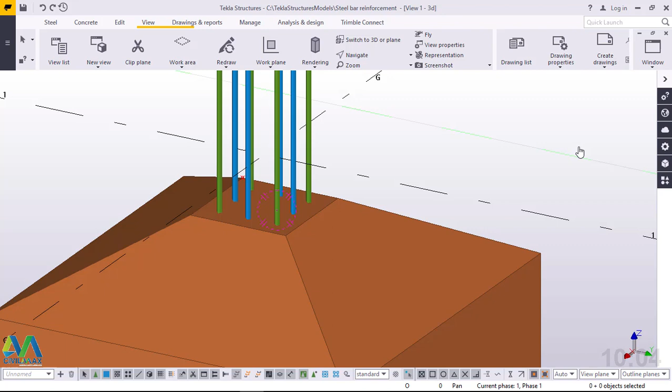If you take a look on the screen, you can see pad footings with some starter bars. Now what we want to counter check is the height of our starter bars. I'll double click on the starter bars, and the starter bars window will come up so I can check the length. The length is actually 600 from the top. This is the allowance we have been given to connect our column rebars to the sloped footing bars.

Now I'll close this, since I've seen the height of our starter bars. I'll click on empty screen just to remove that selection. Now the next step is to place our RC column. I'll come to concrete here and come to the column, then after activating that command, I'll snap right in the middle here.

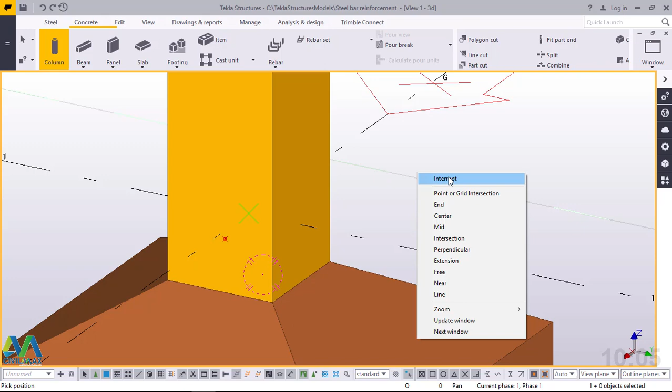Now what I'll do is change the dimensions of this column. I'll just double click on it. Remember, let me just take you back. I'll undo that.

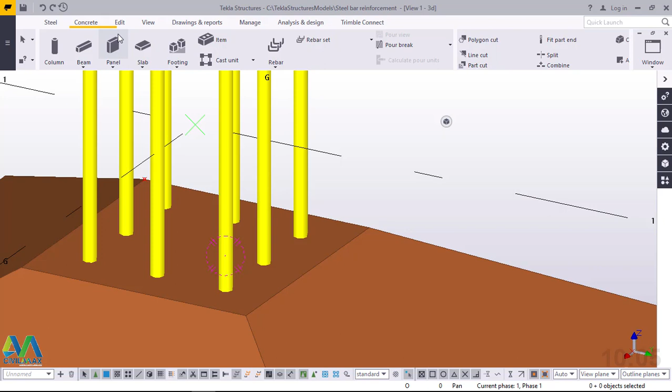Let's first check this measurement from this end to this end. I'll come to edit, then to measure, and click that. I want to measure from that distance to this distance - that's 400. I'll do the same thing here, from here to here - this is 400, I assume. So now it is 400, and our column should be 350 by 350.

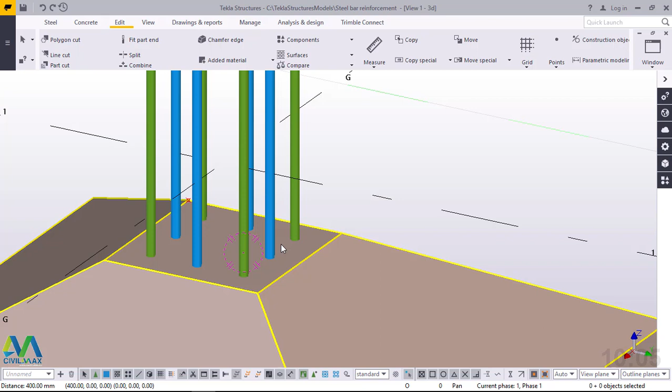Now I'll go back to concrete, pick on column, and snap right there. Right click and interrupt. I'll double click on this to change the dimensions of our column. You can see it is 400 by 400, and we want 350 by 350, not 250, we want 350 by 350. Let me snap in the middle there and feed 350 right there.

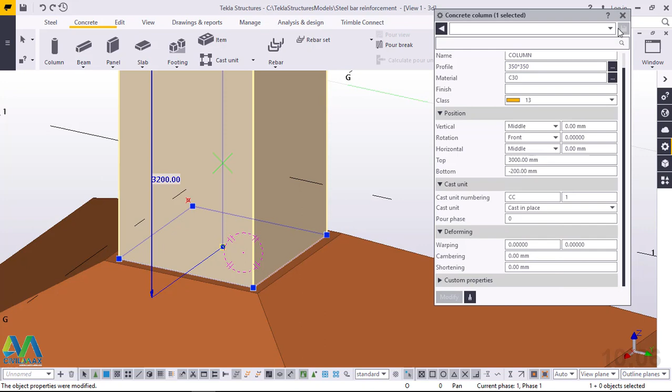Then I'll click modify, and this is what we want. It is 350 by 350. I'll come to navigate and turn this round so that we can see it clearly.

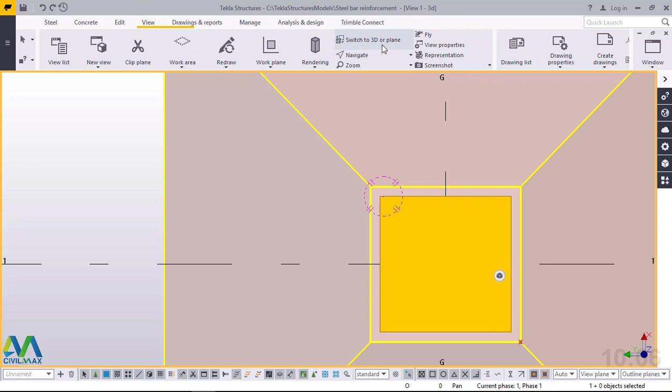If I switch back to top view, this is what you'll be able to see. Right click, this is our column. Now let me switch back to isometric view and bring this close.

I want to turn this round to a position so I'll be able to do my work properly. Let me click on this and click on empty screen. I'll right click and come to redraw to refresh and remove any part that is unnecessary appearing on our work.

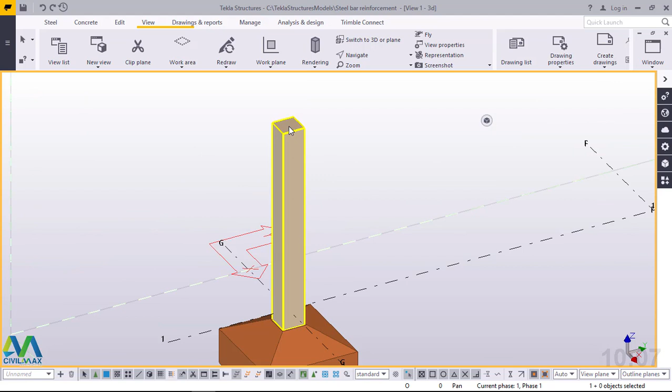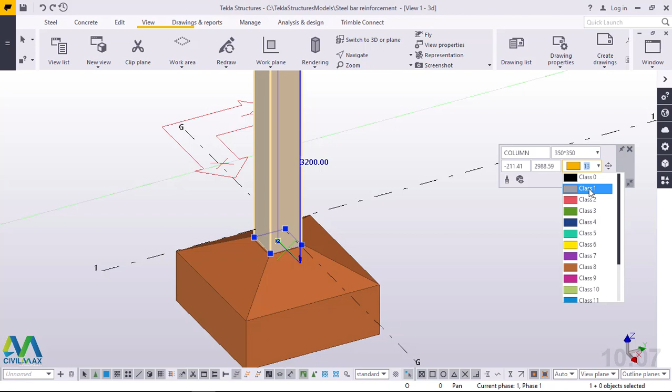Now if you take a look on the screen, the sloped footing has a different color, and the column has a different color, but I prefer working with some uniformity. I'll click on this column and hover my cursor on top of this cube here, which gives me the opportunity to pick the appropriate color to use. I can either pick that, then also change this, hover that, then change to a color similar to concrete, close to concrete.

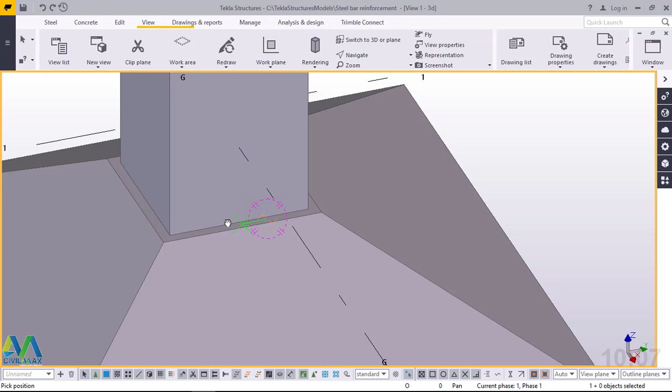Now this is what we have now. I'll come right there and turn this round like that. This is what we have at the moment, and this is our sloped footing. What we're doing now is placing the concrete column and connecting vertical bars inside our column to starter bars for our sloped footing.

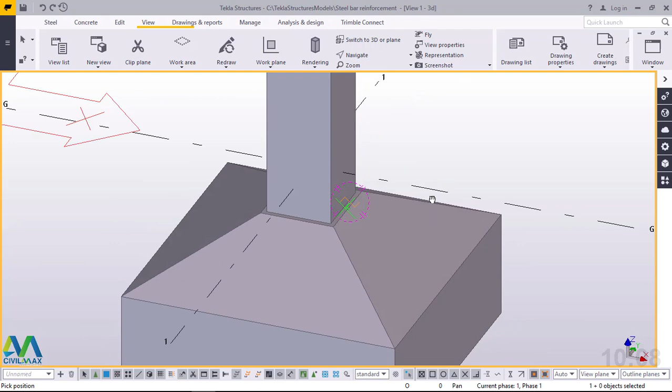Now from this end, taking into account that the height of our starter bars was 600, I want to mark some points here. Right from this end, I'll come to edit, come to any position, and I want to snap at the bottom end here. Prior to doing that, let's first check by how much our column is protruding into our sloped footing.

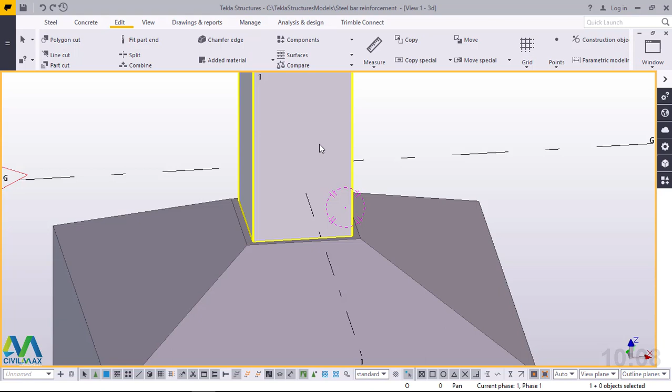I'll double click that just to counter check. Sometimes it goes deep into the footing. It has gone deep by 200 millimeters, and our sloped footing has also encroached close to 0 level by, I presume, 200 millimeters negative.

So they're meeting somewhere there, they're meshing properly. I'll click on empty screen to remove any selection, then start marking. I'll place a guiding point right here, snapping right at the bottom end. I want to offset this point to 600 millimeter height.

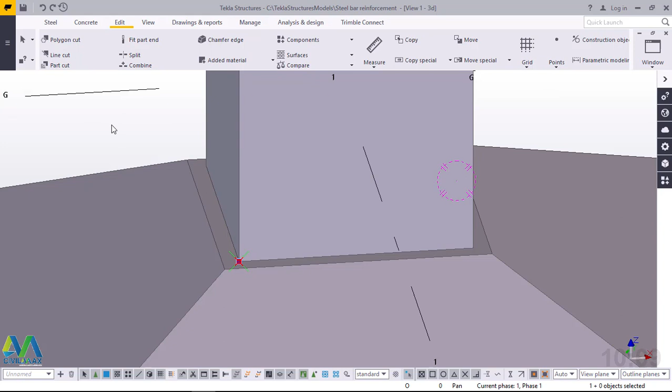I'll click on it, then right click and go to special copy, click linear. On linear, feed 600 on the Z axis going up, then click copy, click OK. After copying it, our point is here. This is the height of our starter bars.

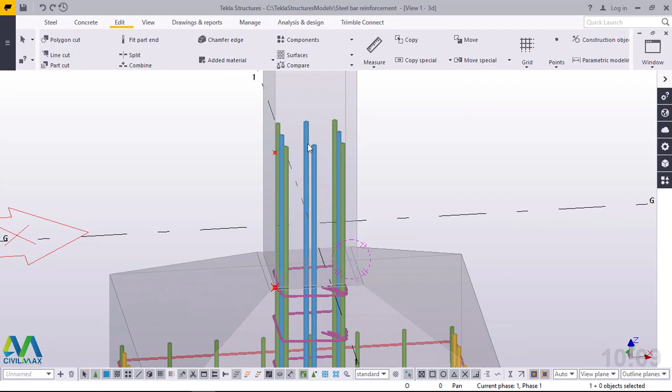It runs from the bottom end here. Then I'll press Ctrl 2 so that we work on a transparent view. It runs from the bottom end here to that height, which is 600.

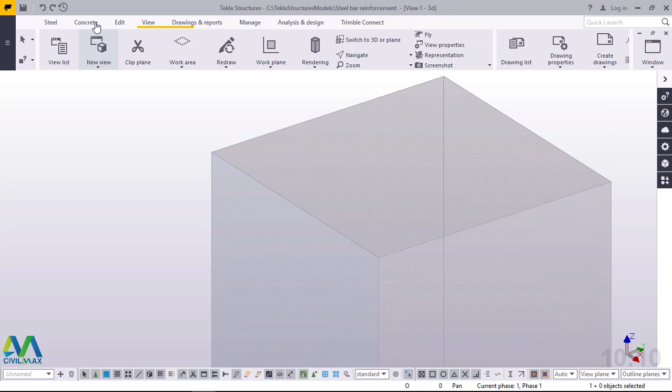Now we are going straight to rebar placement for our column. This one I'll place manually, which is much better. Now I'll come to concrete right here, go straight to rebar, pick on the bar group, then pick on the part to reinforce.

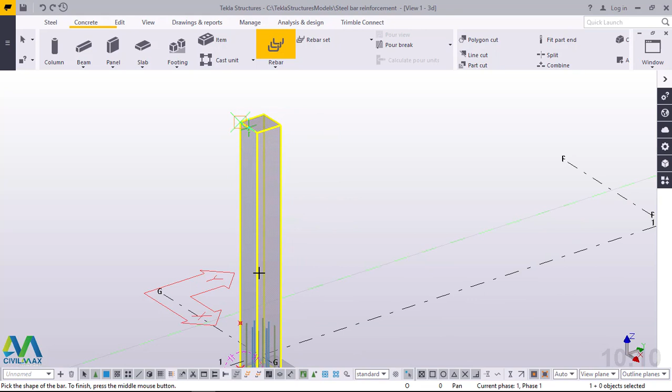Then I'll define the height of my vertical bar. I'll snap from that spot and stretch up to this end, terminating that full length to a point where my starter bars end. I'll snap right there, then press the middle button on the mouse to define the range of my reinforcement.

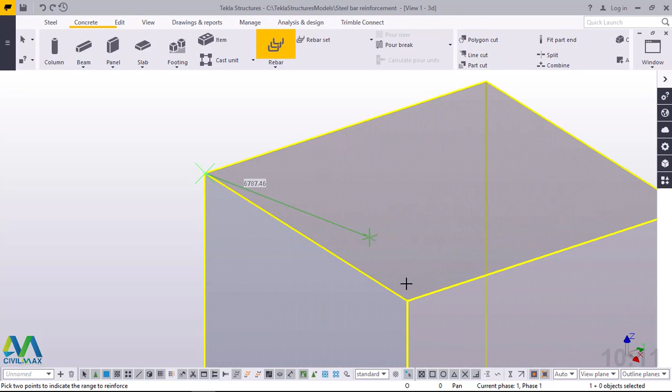I want it to start from this end and all the way to this end. Perfect. Now let me just turn this around to check by how much these rebars have offset themselves away from my column.

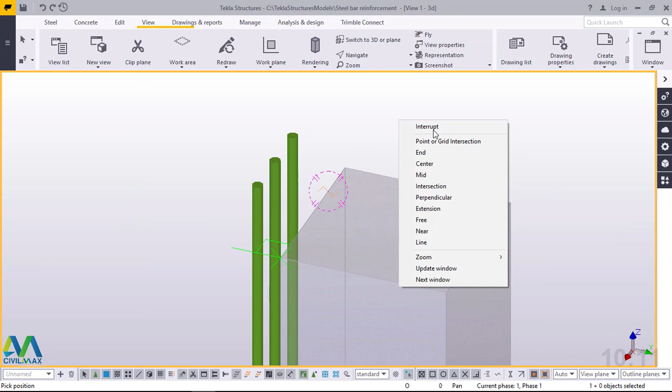Now I want to bring them back inside my formwork. I'll double click on this column, on these bars. Once I've done that, I'll scroll down to cover thickness and feed here.

This is controllable under cover thickness here. Our rebar size is 20, and we can change that to whichever size you prefer. I'm working with 20. The bending radius is that, and we don't need any hook right here. What will be of much importance to us is by how much our rebar is off the formwork.

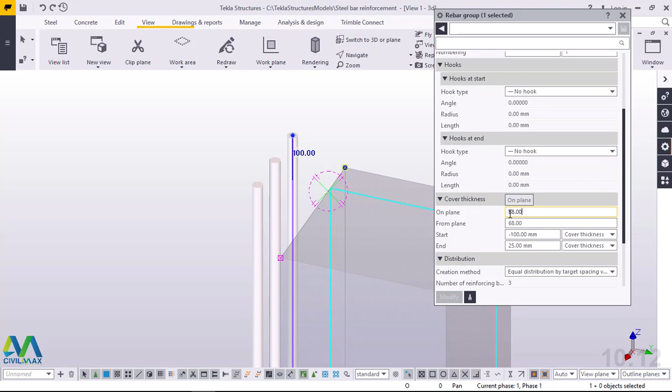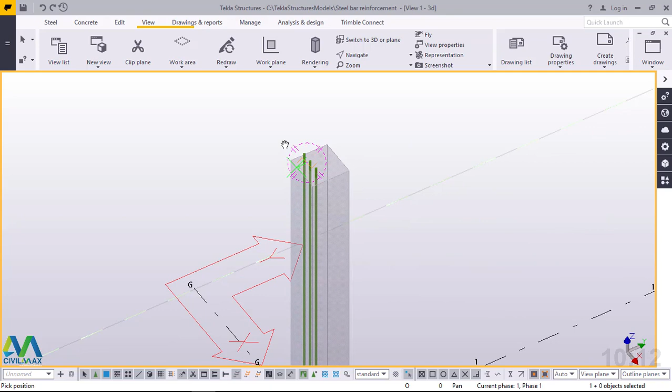Now I'll feed here 68, or it is 68 here, and in this case I'll prefix it with a negative sign. I'll feed there a negative sign right there, and click OK. I'll close this and click on empty screen just to deselect what was previously selected, and I'll do a similar thing here. I want to place some rebar right here.

Right click, then click interrupt, then come back to concrete right here, go to rebar right there, and pick part to reinforce. I'll pick on that part. Then I'll define the length, I mean the height of my bars.

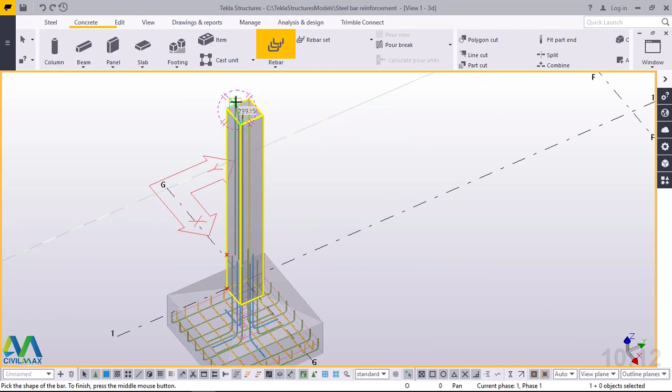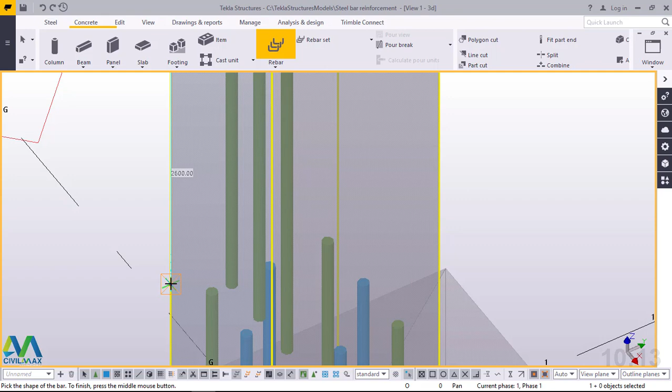Now the best direction is the other end. I'll click on rebar once again and do it on this end, because my guiding point is on this end. Let me just snap on this end, then go all the way and terminate that height of my vertical bars right here.

Then press the middle button on the mouse, then I'll define the range of my reinforcement by snapping on this end, and I want them to go all the way to this end. That is the part I want to be reinforced.

Now what do we do now? Here we don't need 3 bars, we only need 1 bar. And prior to giving it an offset inside our formwork, what we'll do is click on this, then right click and come to ungroup. We'll ungroup that, then we'll delete this rebar and delete this steel.

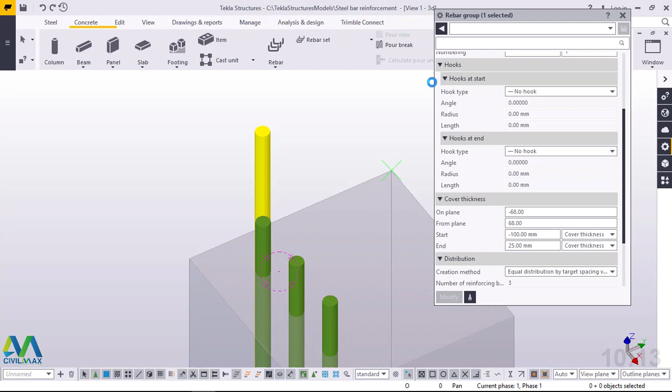Then we'll come to this middle one and double click on it. Once you've done that, we want to bring it inside our formwork right here, and we'll remove that negative sign from that distance. We'll not prefix that distance with the negative sign, and that will pull it inside our formwork right there. Then we'll close this for now and click on empty screen to remove that selection.

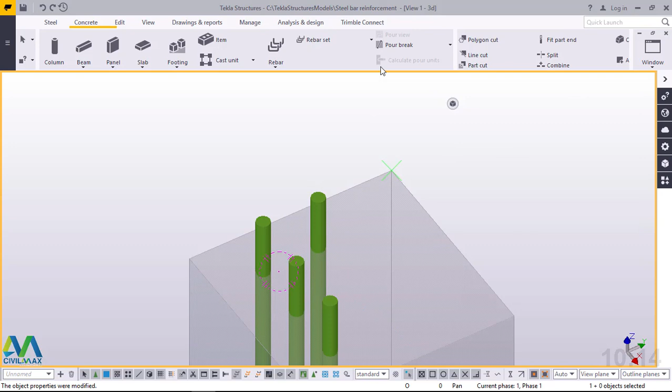Let me just turn this around once again for us to see clearly what we've done. This is what we've done. Now I want to mirror this part and this end. First of all, let me just select the first three.

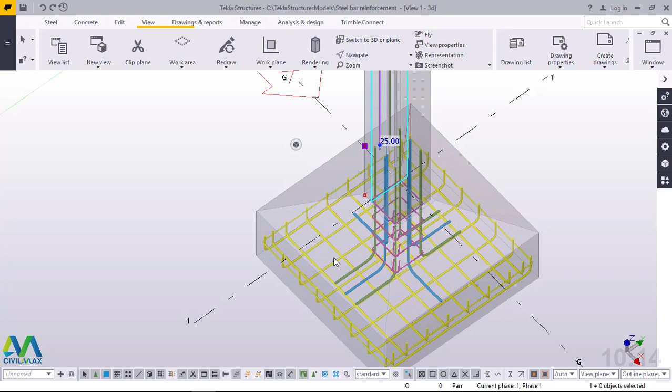Then I'll play around with my work plane tool. I'll come to work plane here and pick on work plane tool. I want to place my work plane tool right here so that I'll be able to define my mirror line. Now, that is the wrong place to place my work plane tool.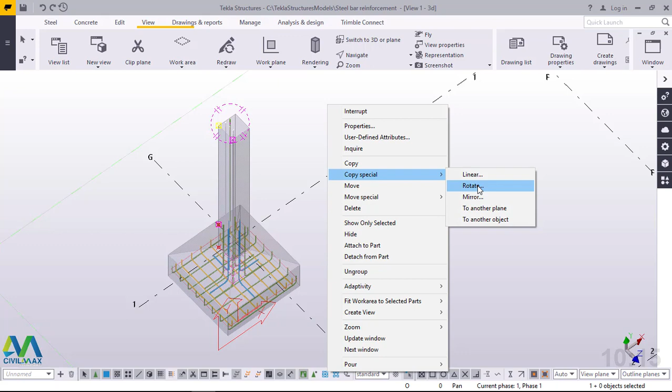I'll place it right here. Perfect. Now I'll right click and come to special copy. I'll click mirror. Once I've clicked mirror, I'll be able to create my mirror line from that spot and terminate it here. Make sure your angle is 90 and click OK. Copy. That's it. Right click and exit.

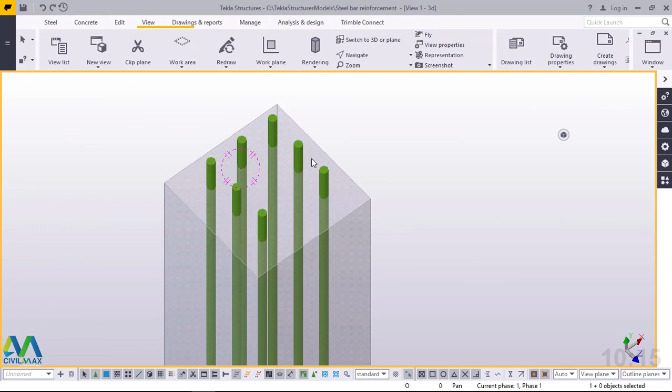It is here finally. Now let's copy this end. Click that. Then reorient your work plane tool. Come to work plane tool. Then we want to place it right here, so in a position that we'll be able to define accurately our mirror line. We'll place it right there, and we'll exit from that work plane tool.

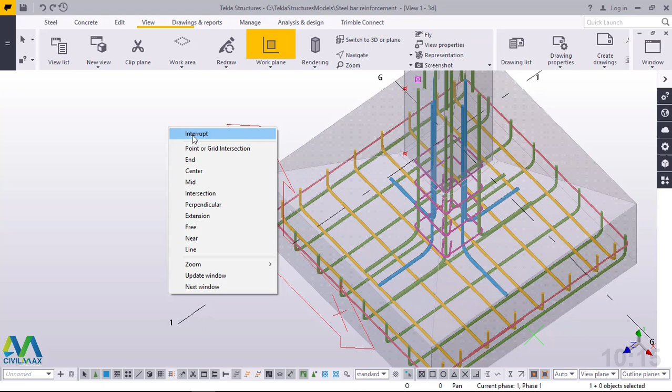To exit from any command, just right click and click interrupt. Interrupt is just a window, an exit window from that active command. Just click interrupt. Then once you've done that, just right click once again and go to copy special. Then from copy special, shift to mirror. I'll pick on mirror. Then I'll define my mirror line.

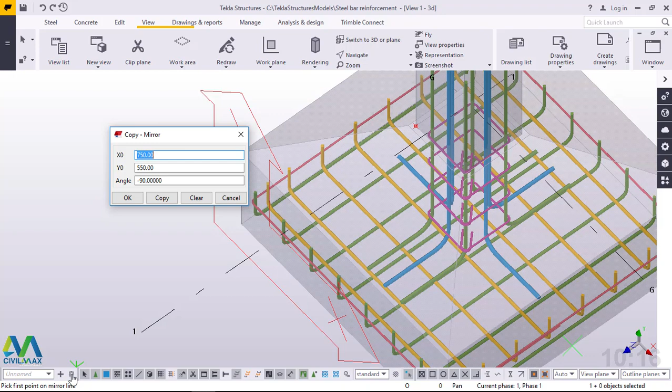You can read it there. Here, first pick on mirror, pick first point on mirror line. I'll define my mirror line here. I want my mirror line to start from that spot and go all the way to this end. I'll snap right there and click copy. Right click and click OK.

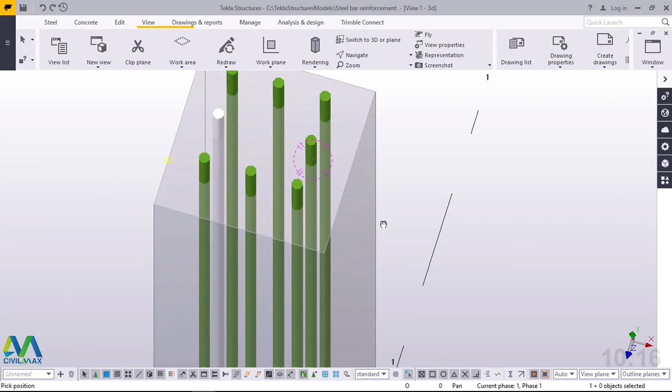Perfect. Now you can see that already shifted to this end, and my rebar and my vertical bars are now well seated or well fixed inside my formwork, so that the concrete can be easily poured into it, and we come up with a properly reinforced concrete column.

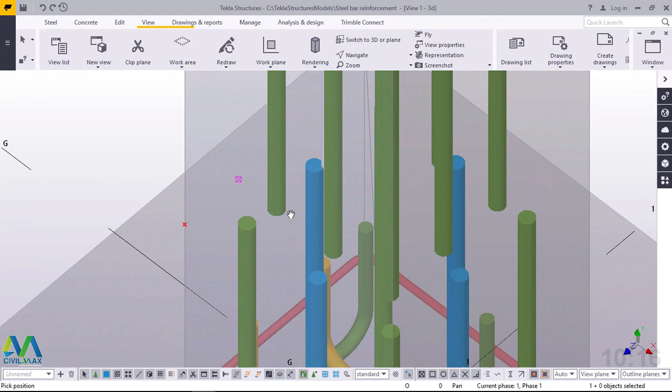Now next, we want to place the ties, and before placing the ties, we want first of all to make sure all these are properly connected. The protrusion is way inside, and what we are going to do is to correct this.

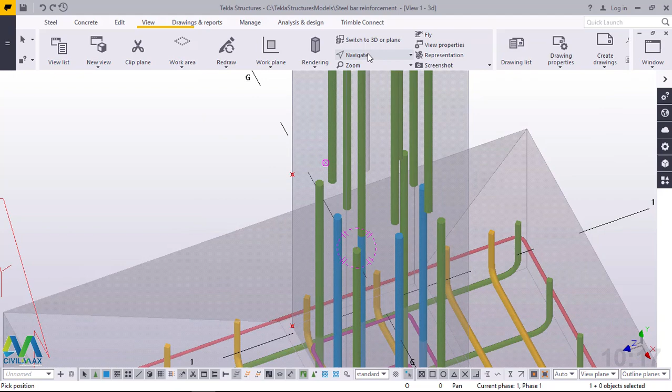Okay, let me just turn this round. You can see that. Now what we'll do, we'll come back to navigate, and we'll turn this to a position that we can be able to see everything when we play around with their measurements.

Double click on that, then that will bring this dialog box. From here we'll feed maybe 42. Then from plane you can also feed 42, and now click modify. Perfect. They're in the right position right there.

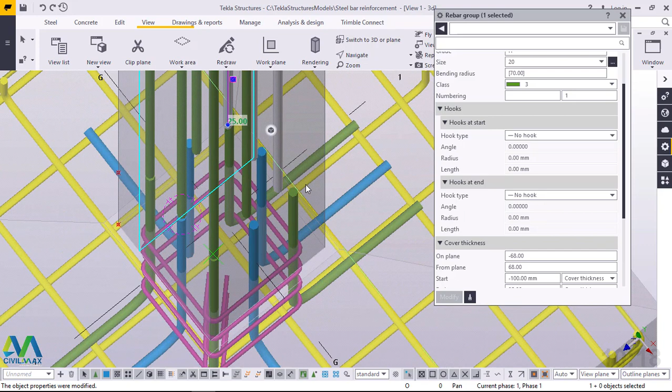Let me just zoom out and do a similar thing at the other end. Double click on that and zoom right at the bottom end here, and make sure the starter bars are facing each other perfectly. Now I've double clicked.

I want to reposition this right to be on top of my starter bar. Now what I'll do, I'll just type there 42, and I'll feed here also 42 on cover thickness. That is the formwork. I'll close this.

Now I'll do this. I'll do the same thing here. Double click that just to reposition all this. I'll come all the way to this end, and I'll feed 42 here and click OK. That will pull it to the right position and the cover thickness.

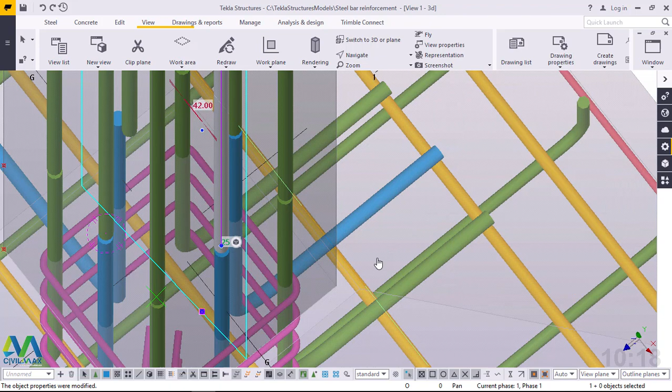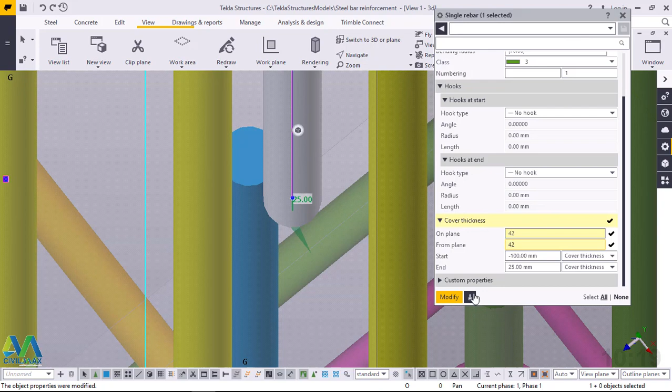And I'll do the same thing the other end. Double click that and I just zoom at the bottom end so that you can be able to see how this is shifting to the position I prefer. There, I'll just type 42, and I want that also to shift from the plane by 42 millimeter, and it will go right on top of that.

Remember, let me just turn this round so that I'll be able to see clearly what is really happening at this end. This one has positioned itself properly, and the other one hasn't.

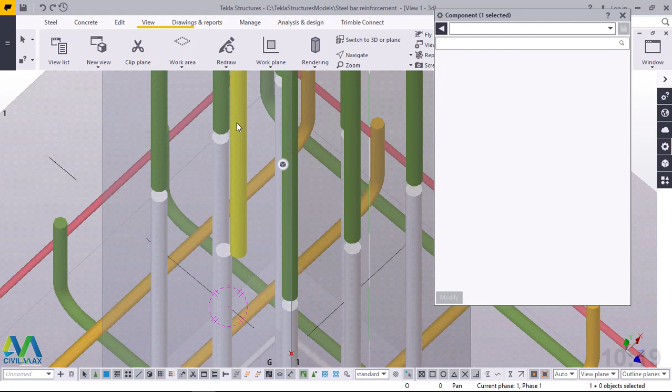And the reason why, we'll minimize a lot of work by deleting that. We delete that. I'll close this. Then we'll copy it right at this end by mirror command.

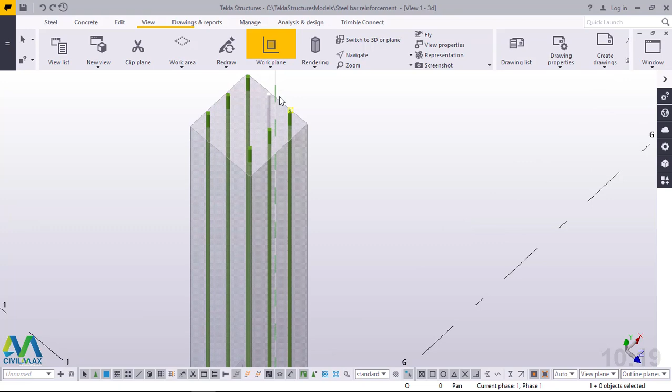Just click on that. Then I'll come to work plane tool right here. I'll place my work plane tool right here. I've already picked on it. I'll right click and come to interrupt. I'll come once again to special copy and click mirror.

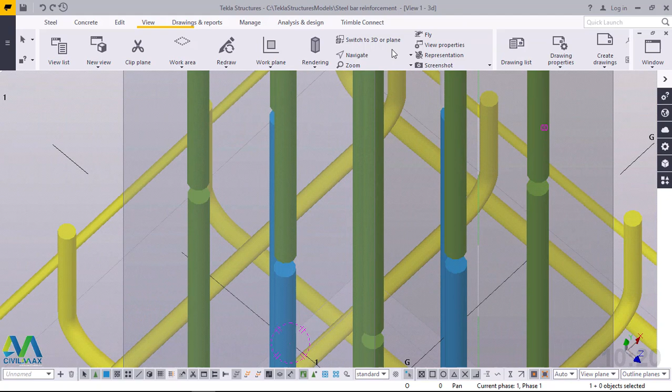I'll come all the way here and snap on that spot, and I want to mirror that to the other end. Click copy and click OK. Right click and interrupt. Let me check whether it has positioned itself perfectly. It is in the right position now.

Perfect, you can see that. The column, the rebars for the column are rightfully facing the starter bars for the pad footing. Now we want to connect these two. Let me just turn this so that we can see it clearly.

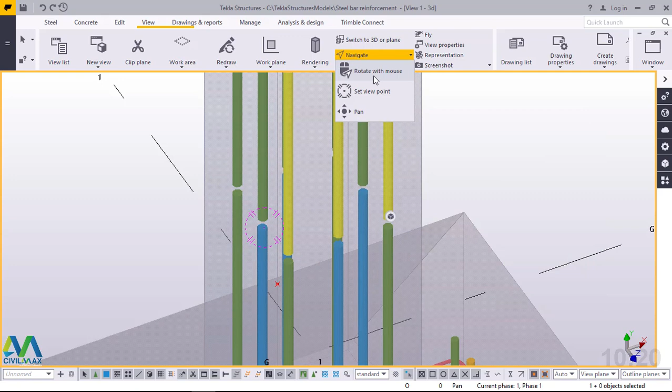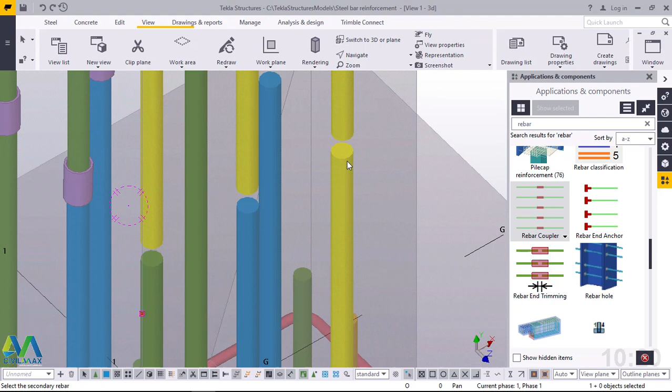Now I'll come to applications and component right here, and I'll type rebar, and use the rebar coupler right there. Click on the rebar coupler, and I want to couple this to this, and also couple this to this. This one should connect to that, and this one connect to this one, and also connect this one to this one, this one to this, and this one to this one. That's all. Let me turn this around so you can see it clearly.

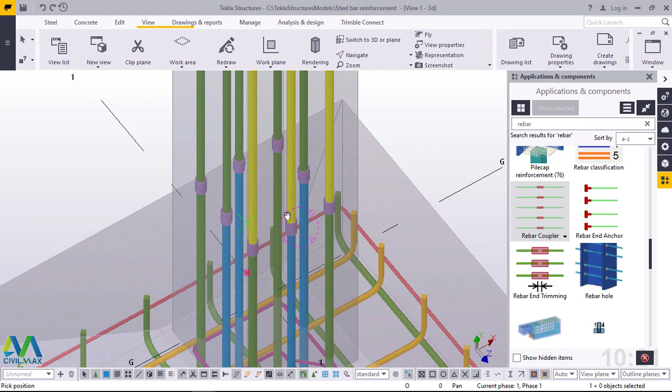Now this has been done, and what is remaining is just to place our ties. Now we'll go to ties placement. We'll go straight on top here. Right click, and we can now redraw this.

We'll come here and turn this round like that, and go straight to rebar right there, come to rebar and pick on that, and pick on the parts we want to reinforce. Pick on the part we want to reinforce.

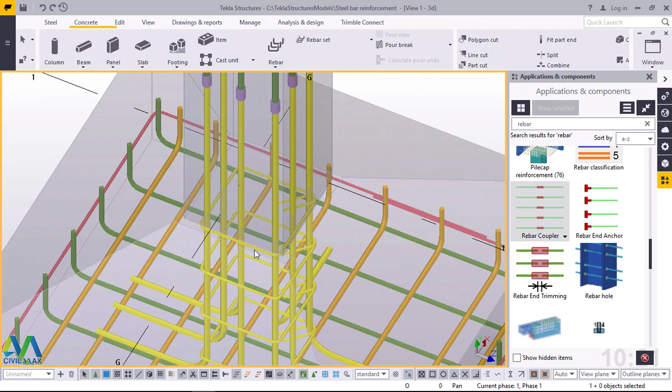What I've just realized... that's okay, we've done nothing wrong.

We'll come back to rebar right here and pick on the part we want to reinforce, and snap on top of this bar and come all the way to this end, and snap right here, and snap also right here, and snap on top of this bar and go all the way to this end, and press my middle button right there, and I'll define the range of my ties. I'll snap right there perfectly, and right click and exit from that spot.

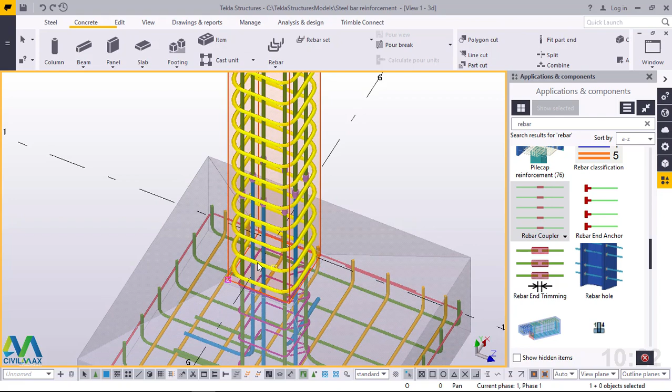Now what we are going to do is reorganize our ties. Now what I'm going to do is just double click on the ties. Once I've done that, I'll wait for this dialog box to load.

Then we'll use R8, or whichever bar we would like to use, but the size I've picked here is diameter 8. Now on hook to start, I want my hook to bend at 135 degrees, and that length is okay.

Also here I want 135 degrees. That bend radius is okay, and length of my bend, I just leave it at 90. And at cover thickness here, I'll feed 15, and also...

And here also I'll feed 35, which will be okay, and this will be adjusted to 25. I'll feed here also 25. Perfect, and I go straight and click OK.

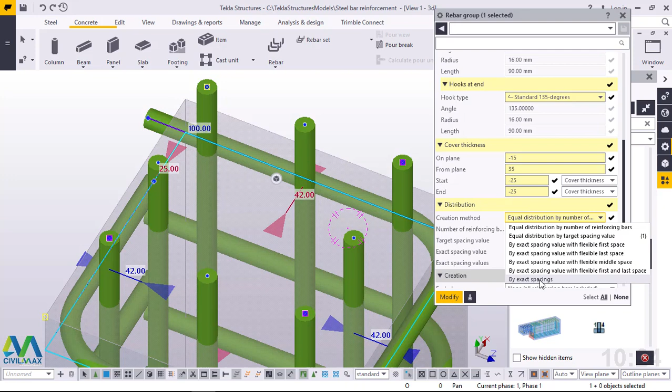But prior to that, I want to change the creation method. I want to use the exact spacing. But how many do I want? I want just 17. Now I'll come back here and switch back to that and change that to 17. Perfect, I'll come back to exact spacing and click OK.

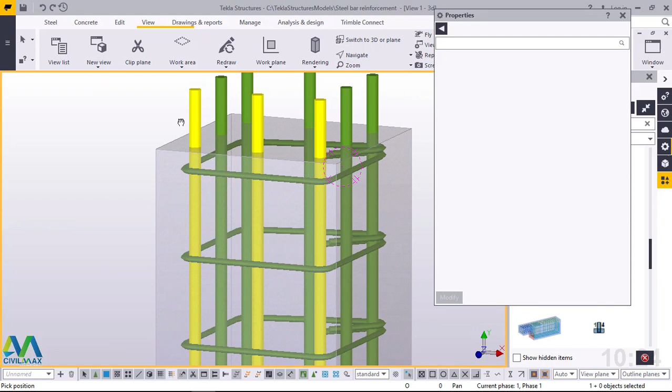Perfect, I'll click on empty screen and we'll be able to see what has been created here. You can see this. Come to navigate and I'll click on that and turn that round. We've placed our ties. I can also come right at the bottom end here. You can see our ties at the bottom end here.

Now we'll use two ties in this column just to enhance the strength of our column. Now I'll right click and exit from that.

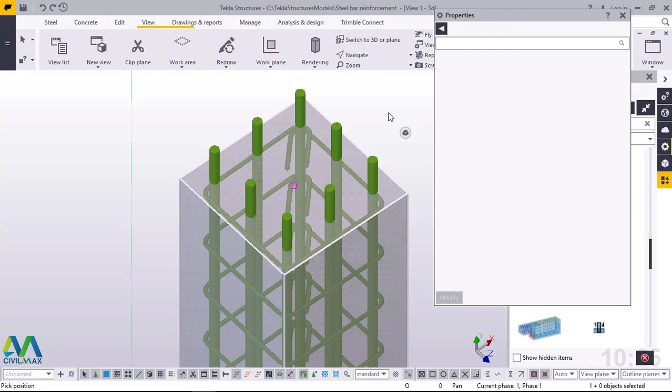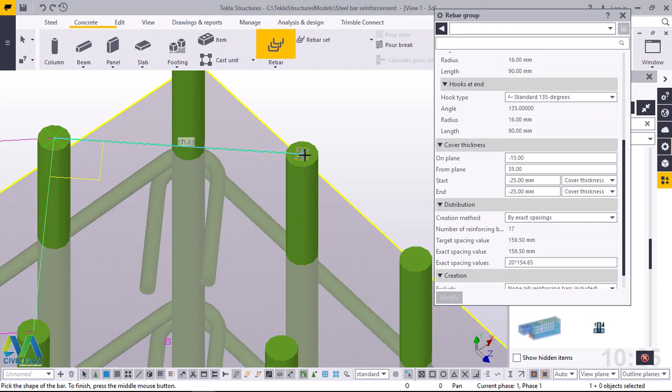Now I'll go back to the column right here and come back to rebar here, and pick this part to be reinforced. I want to reinforce this column, and my next tie I want to start from this end. I want to start from that end, and I'll target this point and target this point, and go all the way to that spot and target this midpoint and terminate it right here and press my middle button on the mouse.

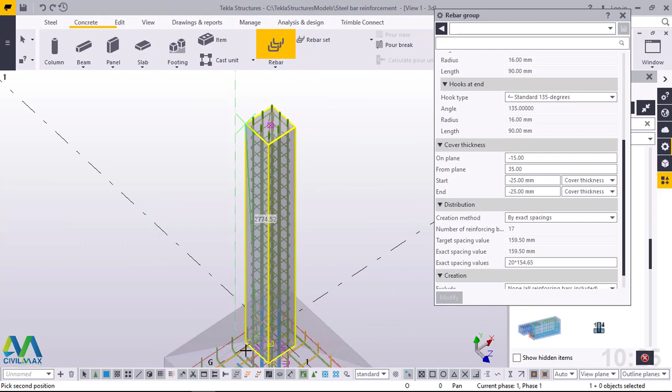Then I'll define the range of my reinforcement. I want it to start from that spot and stretch all the way to the bottom end of my column right here. Perfect. I'll right click and click interrupt just to get an exit window of that command.

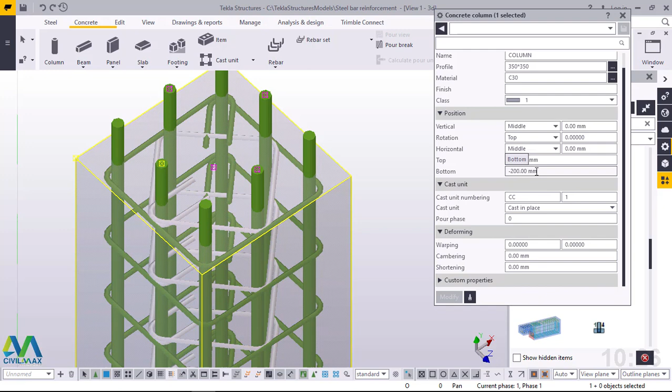Now inside here, this one I'll feed under cover thickness. Just scroll to cover thickness right here. Concrete column - this is concrete column, this is not the rebars.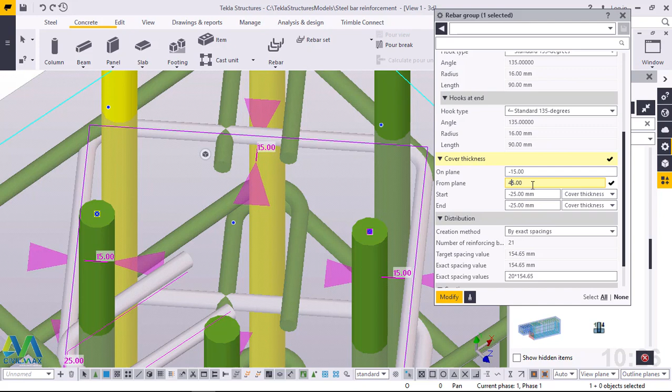Let me double click on this rebar, on this tie, then scroll right away to cover thickness. I'll type 45 right there, and the rest remain the same, just to make sure there's no tie clashing with the other tie.

I'll close this one now, it has no use for us now. I'll click on empty screen, then bring this close so that you can have a clear view of what we are doing.

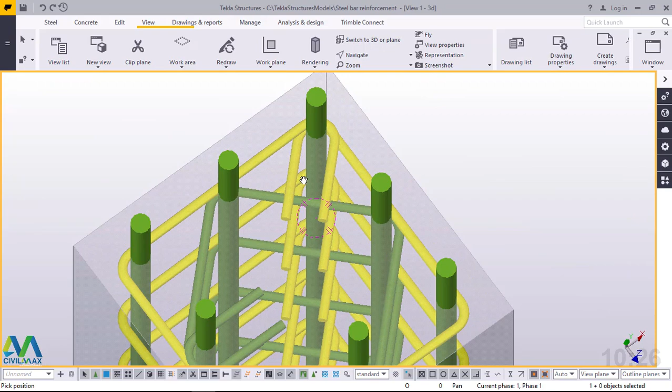Turn that round - you can see our ties already in their right position, well fixed, and this is neatly done.

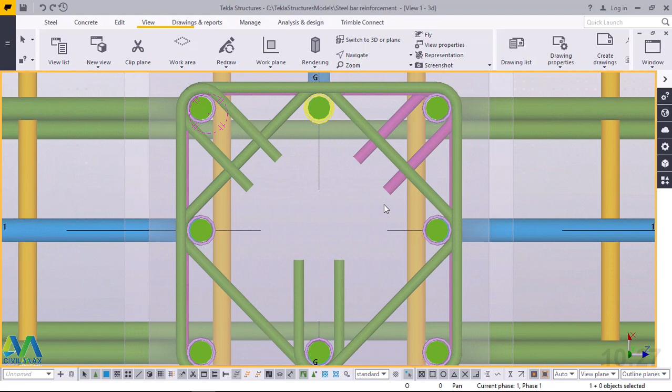I can switch back to my top view. I right click and interrupt, and I can bring this close so you can view it from the top. This is our column, and you can see our connection from the footing starter bars to our main column vertical bars. You can see them right there.

Perfect. What we are going to do right now is switch back to our isometric view, and we want to populate this all over our grid. Let me turn that round, take this work plane tool to a global position right there, select everything, press Ctrl, and deselect my grid.

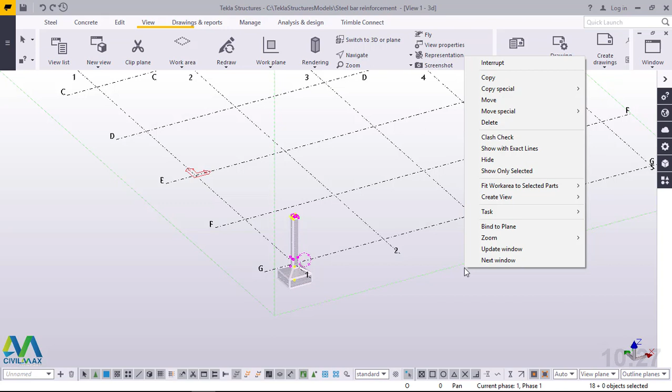I'll right click, and today we want to use a linear copy. First we'll counter check the center to center distance of this grid. I'll come to edit, pick a measure, and measure from this distance to that distance and make sure it is 6 meters. Now, how many do you have?

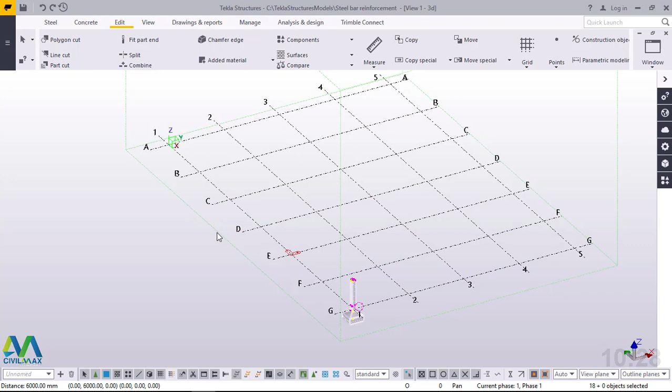We have 2, 3, 4, 5. And how many do you have on this end? We have 1, 2, 3, 4, 5, 6, 7. Just highlight that, press Ctrl and deselect the grid, right click and come to special copy and pick linear.

We want to populate this on the x-axis. We'll come to x-axis and feed 6 meters here, and make sure the z-axis and the remaining axes x, y, z go back to 0 or are defined as 0.

Now we have 1, 2, 3, 4, 5. We'll feed 5 here. We have one already in place, so we'll just feed 4 right there and click copy. There we are. We'll click OK.

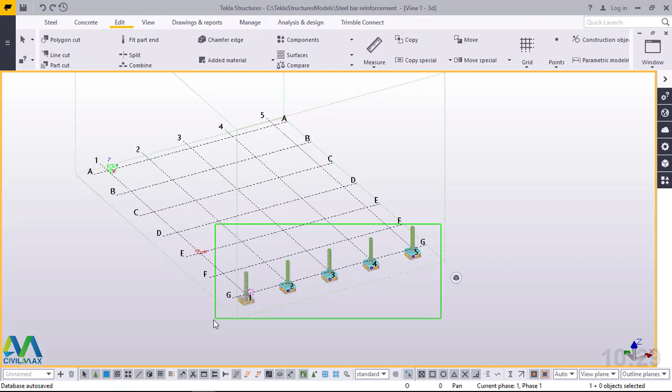Then we'll highlight everything right here, press Control, and deselect that. We'll right click and make sure we exit from that command. Let's now count how many we want to populate on this end. We have 1, 2, 3, 4, 5, 6, 7. We have the 7th one.

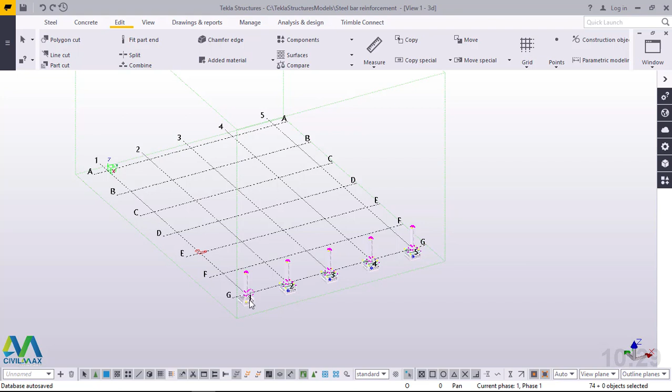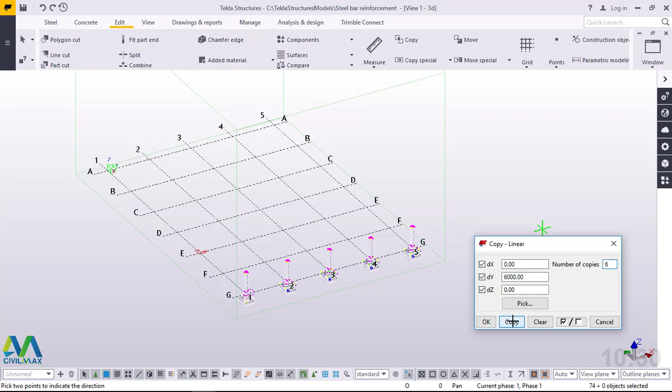We'll right click and come to Special Copy, click Linear, and populate this along the y-axis. We'll come to y-axis, copy that and paste it here, paste that here, and change that one to 0, and we want 6 on the other end. Just go ahead and click copy and wait for the result. There we are - it has been copied, just go ahead and click OK.

Right click and exit. Now you can bring this close. If we switch back to our rendered view, you can see some traces of our chamfers.

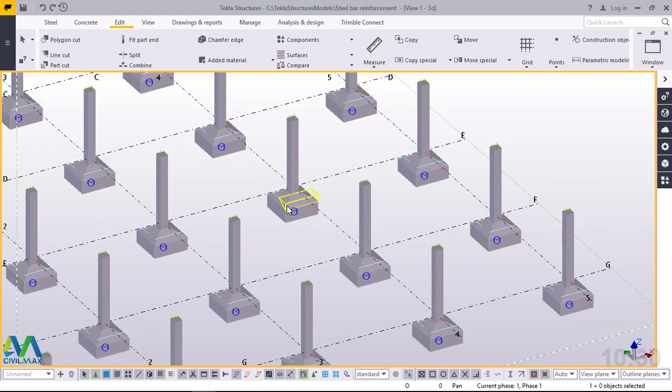I mean the method used to create the sloped footing. Just right click and refresh, and everything will disappear. Perfect, and this is what we're having now - this is what we have at the moment.

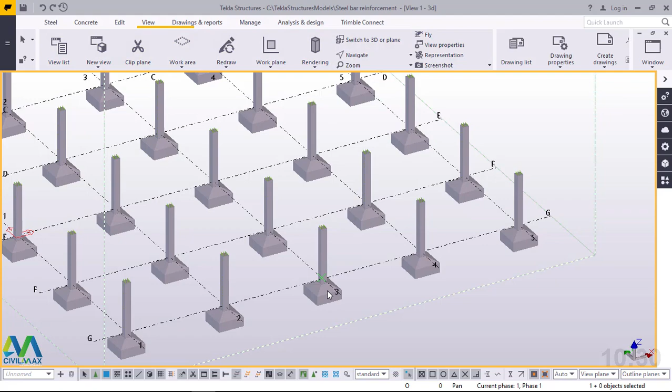This is our column and our sloped footing. Now we can press Ctrl 2 so that we can see whatever is happening inside.